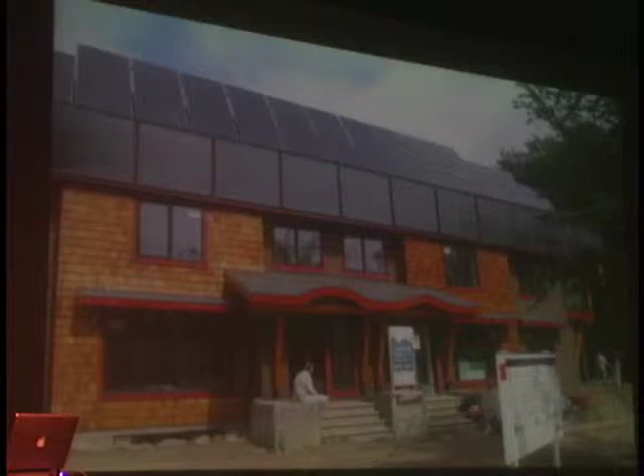Then we come close to 40 years into the future, and this is a house that I feature. These fellows who did this house, Peter Amerongen and Gordon Howell, two engineers—one's a contractor, one's an engineer—from Edmonton, did this Riverdale zero net energy example for Alberta. It's in downtown Edmonton. It's a duplex. It has amazing characteristics, and of course, when you get to 2008, you can now go zero net with both solar—vertical solar collectors for heat and hot water—and also electricity with photovoltaics.

And you can use the clever idea of a duplex so you can share a common wall and save the heat loss in one wall, because you now have 2 family spaces sharing one wall, not losing heat against that wall because it's the same temperature on both sides. You actually double the area for solar collection for the same heated spaces below. So if you build a whole block of these, you can see what an advantage that would be.

This is what we're looking at in how we moved. This is best looked at from right to left, which is sort of the Chinese way to look at this, I guess, but this is how the article was set up. My house, off Farmers Loop, I bought in 2001, and it was a 1975 house. It was sort of like this, a 2x4 house, R12 wall, ceiling—well, we had a lot more insulation in the ceiling than that.

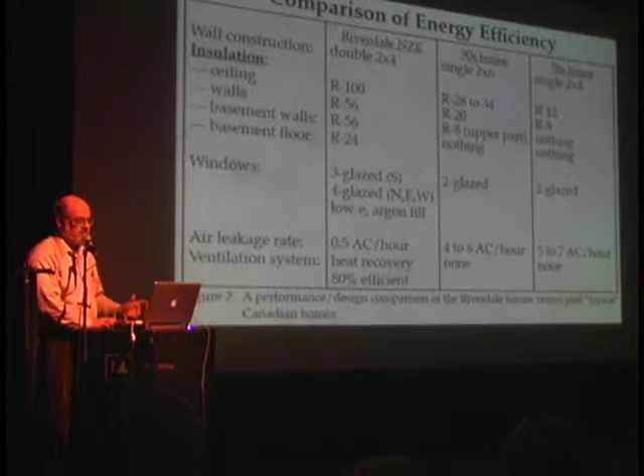So why do you take it to this limit? Well, the condition given for net zero energy is: try and save as much energy as you can so that you don't ever have to buy it again, because the way you're going to get it is from solar. You have to build this house presuming that natural gas is never going to be available, so anything you spend for energy has to come from solar. Solar is a whole lot more expensive, so it really, really pays you to save that energy, because once you've saved it, you never have to buy it again.

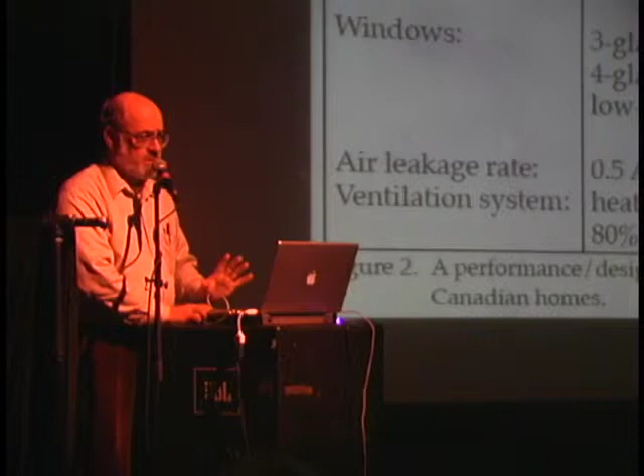That lesson needs to be really inculcated in our system and our paradigm, because time and time again you hear in politics, from public speakers, on talk radio, that what we really need is cheap energy. No, what we really need is really, really efficient houses so that we don't need energy. That's what we really need. We need to escape from the need of combusting fossil fuels, and the best way to do it is this zero net energy idea.

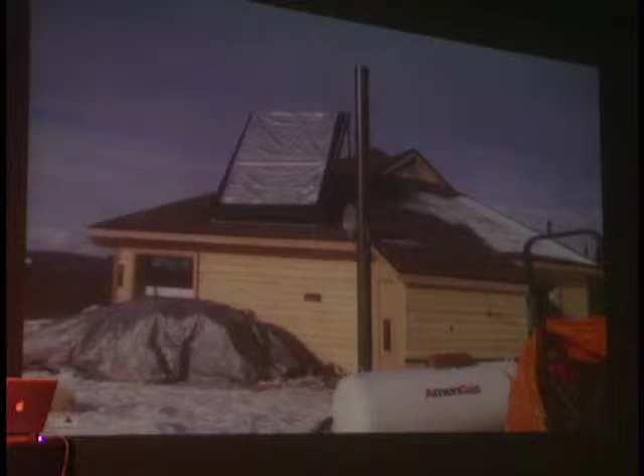I think, I don't know, but Torsten can tell you who built his—I think Dan Givens did this, but I'm not sure. Dan has been the go-to guy for masonry. He's a mason and has done a lot of them now. He had a booth at the home show.

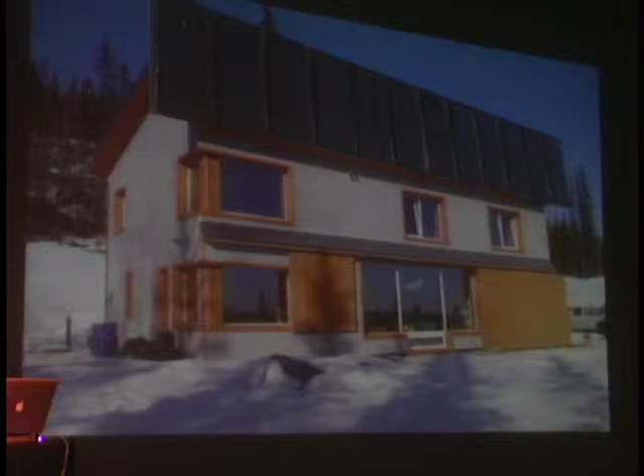You'll see more of this. This is Torsten's—I don't want to overplay this, but I finally got to visit it after the home show. He has exterior shutters and a solar design very different from Carl's house. Both these guys are really doing research for the rest of us, and that's what I love about this community. It's always been that way, and now we're back at pushing the envelope again.

We'll talk about it. Not going to talk about this a lot, but some other things about how to design from the sun. This is from Freiburg, Germany, the solar city, where I took a course on integrating solar design into buildings.

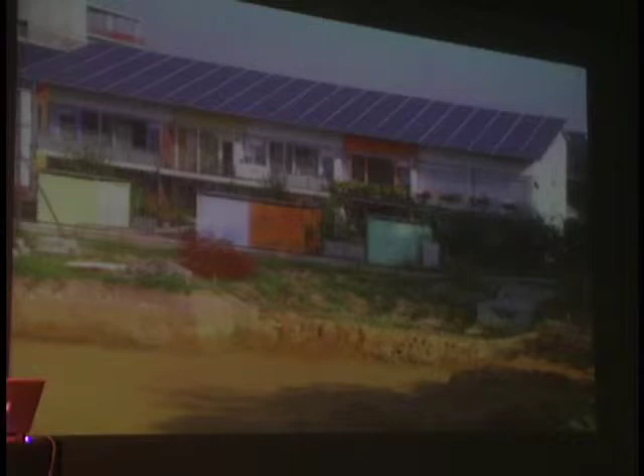Right now, you'd want a shade such that at the equinox, about half the window is covered. At the summer solstice, you'd want all the windows shaded so you don't overheat. That's what this exact thing does. We can do this here. I have an example of how to do that in the manual. I always try and show this slide because it gets a concept and a magnitude of comparison across to people which is impossible any other way.

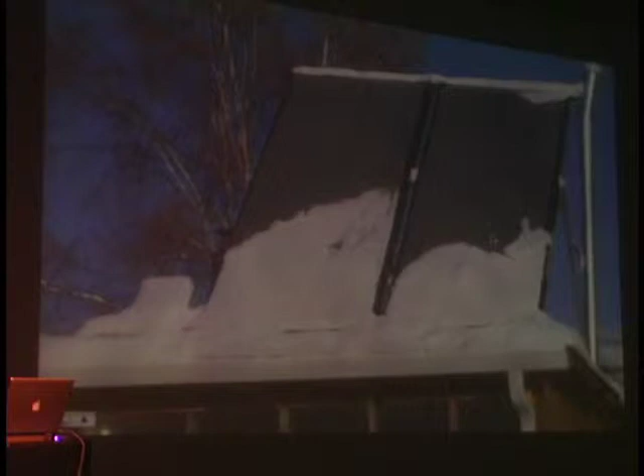This is my own solar collector, and I just thought I'd put that up there. Here's what happens if you don't think through what happens with snow—I have a photovoltaic solar pump, and I put the collectors at 60 degrees. In spite of what I say in my solar manual: don't do as I do, do as I say. Put them vertical if at all possible—you won't be sorry. That's what it looks like inside, and I'll go now quickly.

I don't have that much time because I want to give Torsten a good shot, and I've got to change computers. But let me go to the solar design manual—make sure I get the right one.

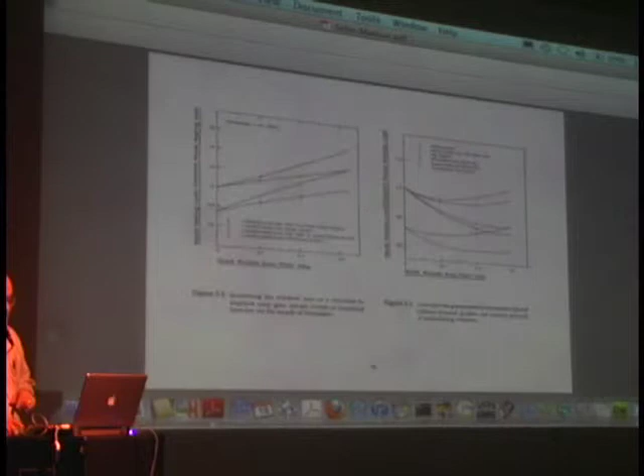Okay, I'm going to—you can see this back at the—let me see, I'm going to go to the navigation panels. Well, let me just go. Okay, let's go, there you see—let me make it a lot bigger.

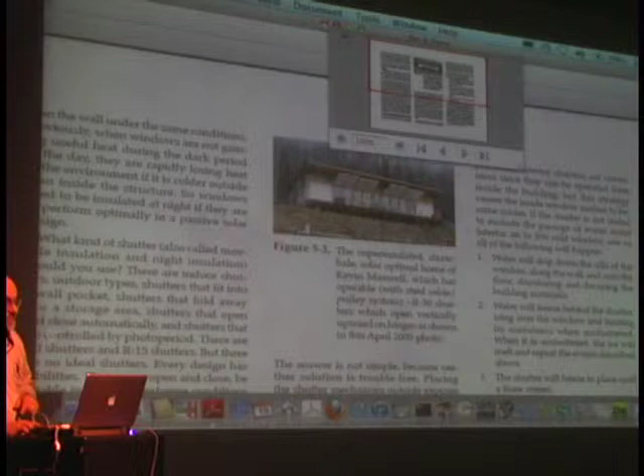There you can see Kevin's house again, super insulated, straw bale, solar optimal house of Kevin Maxwell.

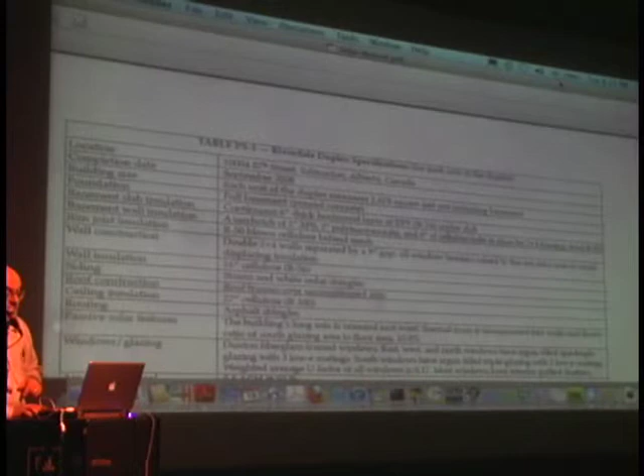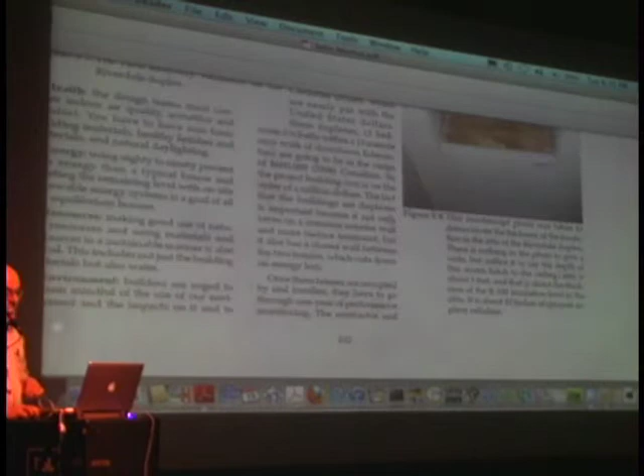But I want to go to the optimizations that I do. What I did was try and use a computer program called F-Chart to see what kind of performance, what kind of savings you could get by trying to increase the solar gain, increase the insulation in various ways by modeling it with a computer program called F-Chart, which has a passive solar design option, and I can set it up to say all these things. The window area, I can change the number of glazings, the slope of the window, the night window conductance, the day window conductance. I can make it appear to have a shutter. And I can do all these things, and I did it for Anchorage.

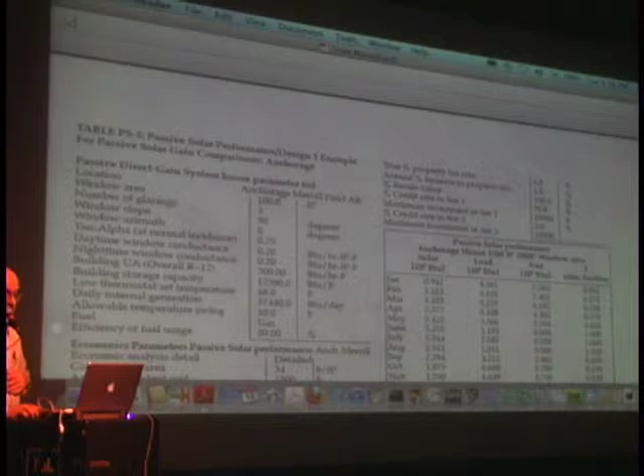I want to show you some of the things that happen here. The first thing I did is model the solar performance of what is effectively an 80s house with an R value overall of about R12.

This is the backup heating requirements. This chart is complicated and I have to quickly go over it, but this is the amount of solar energy gotten on the windows. Just to make it clear, this is in millions of BTUs, and I have an easy way for you to understand what that is in terms of gallons of fuel oil.

One gallon of fuel oil has a gross heating capacity of about 138,000 BTUs. If you burn it at 70% efficiency, it's about 100,000 BTUs per gallon. So 10 gallons of fuel oil is 10 times 100,000 BTUs, or a million BTUs. So if you simply take these numbers and add a zero, you get the number of gallons of oil equivalent, just about. So the amount of solar energy on 100 square feet of window in Anchorage over the year is 270 gallons of fuel oil equivalent. Is everybody with me on that?

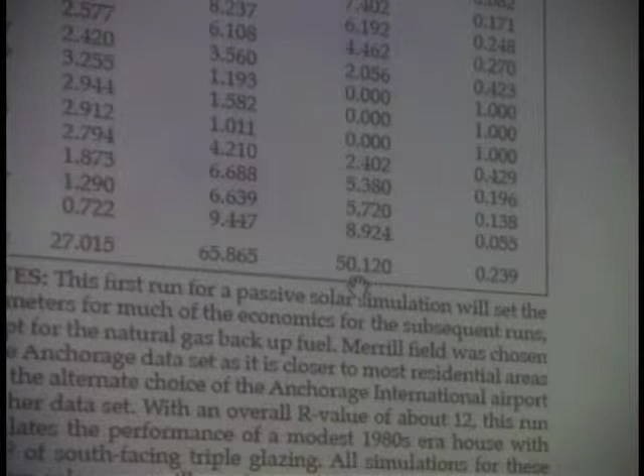Making a quick run here. And the load for the building, this is a 1,200 square foot house with 100 square foot of windows, no shutters. It actually takes 658 gallons of fuel oil equivalent. Of this 658 gallon load, the backup system gives you 501, and the solar fraction is 23%. Of this amount, you can only use 23% of it to get your solar heating fraction.

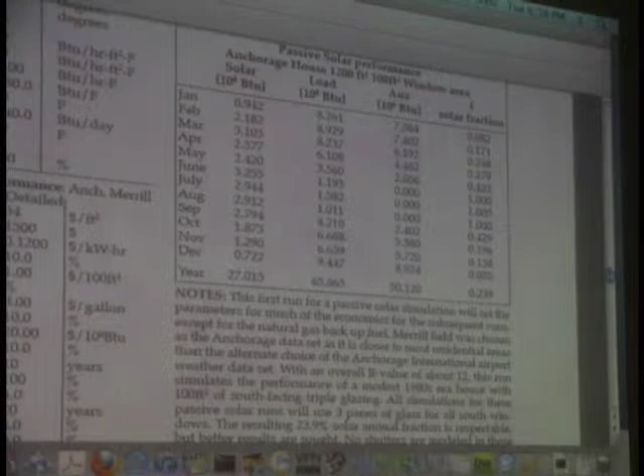This is the fraction of solar heating by month. You actually have 3 months of the year when solar heating gets you, but it's the months of the summer when you, of course, naturally would. That's what the sun does in the summer, keeps you from having to heat.

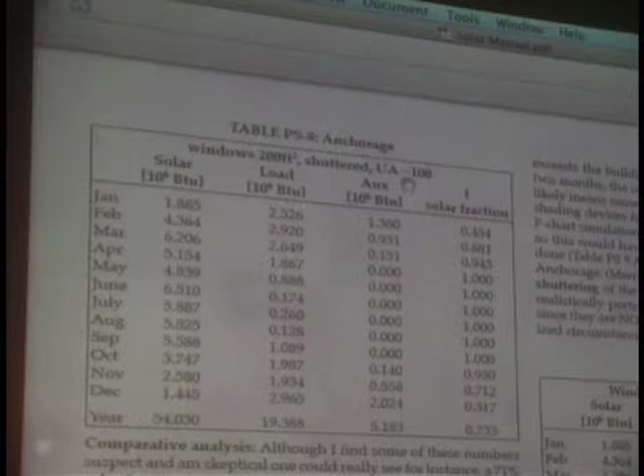Well, what you end up with, and let me go to the final shuttered option, is in Anchorage. What I do is I go through several iterations and I come up with a 200 square foot window shuttered house with R values of about R37 all around it except for the windows. It has shutters on it of R10. Remember what the amount of energy was in the first house, the 80s house, about 501 gallons of fuel oil. You end up with a house that uses 51 gallons of fuel oil.

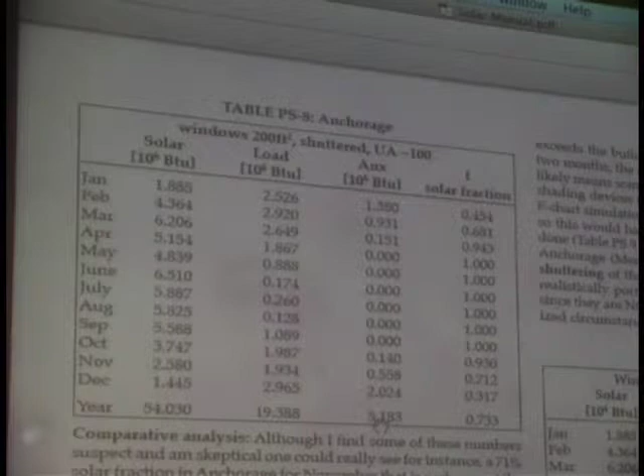What that says is, it should be feasible. This is Anchorage, and Anchorage looks pretty good in this kind of optimization. If you really super insulate the building, optimize it, shutter it, you can cut energy use by 90%.

Now, there are lots of problems with this, because what happens in the summer and in the early spring is you overheat like crazy. And I have a solution for that. But anyway, what I do is I say, okay, we don't really have shutters, so I'm going to say, what's the option without shutters? And it's not all that much worse. It's 72 gallons of fuel oil. But if you don't have shutters, it makes a difference, but you still do pretty well, and you get a 67% solar fraction. Now, these are pretty amazing numbers, and I could spend more time on them.

In Fairbanks, if you do the same thing, you start out with a solar fraction—you can't do as well because it's colder and darker in the winter, it's a harder place, we've got to be more clever. But you start out with 757 gallons of fuel oil, and you can get down to an optimum of about, let's see, what do I finally get to here? 263. I think we can do better than that. Let me see. Yeah, 141. So you can cut about 80% in Fairbanks. Not great, but it's pretty good.

You're getting much more sun on the windows than you need in the building, and so you've got to do something to shade it. I have a solution for that too.

Let me go through this, and here's the solution, which is already out there in the real world on the President's house on Yankovich Road. This is the most—and I give credit, and this is all I'm going to do because I want to give Thorsten 45 minutes or so—but this is the solution to overheating.

It is a fixed overhang shutter—not a shutter, but a shade—which all you have to do is know the solar geometry. It turns out the highest elevation angle the sun reaches in Fairbanks is 49.5 degrees. So if you know your trig, you know that opposite over adjacent of 45, which is pretty much going to shade everything, is 1. The tangent is 1.

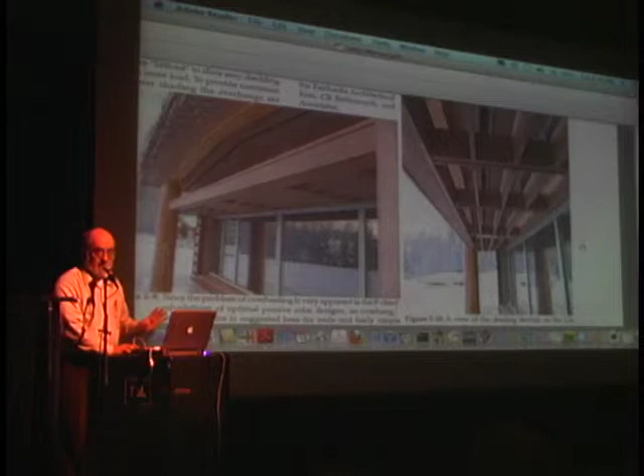So, lots of things more I could talk about, and it takes me five and a half hours with the photovoltaic chapter to go through the manual, so you're getting a really quick journey here. But let me stop there, and unfortunately we can't take questions because I've got to dismantle my Mac addiction and let him do his PC.

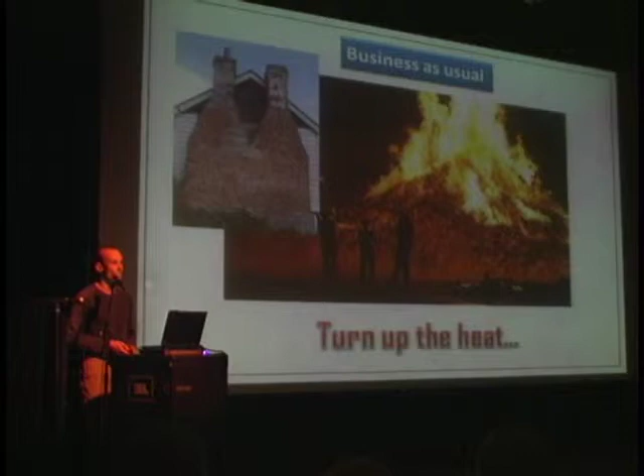Why are you guys here? I think that's one of the reasons. We are basically operating on a concept of business as usual. We're building very inefficient buildings. We're adding lots of heat to them to stay warm in a cold climate, and somehow that equation doesn't work out anymore. So where are we going? What's the direction we're heading right now? That's my question. I don't have a crystal ball, but I don't believe it will be very pretty when we get to the top.

I wouldn't be surprised if we see $5 for heating fuel by next year. And then what are we going to do in this community? So we have a problem. We are in trouble. We know it. Evolution is catching up with us. The trouble really is not that we are in this position, but that we are still arguing about it—we're not doing anything about it. So we have come up over the last 4 or 5 years with some good solutions: green building, all of these great building standards, LEED, National Home Builders Association.

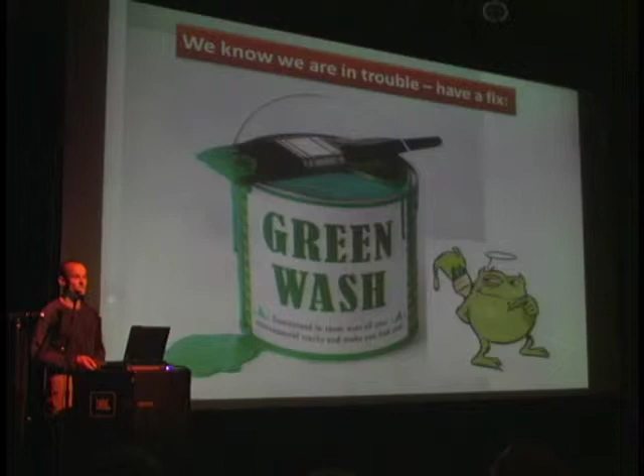Everybody comes up with some solution, but in the end, today, it's all greenwash. There's nothing to it, there's no substance. And then the auto industry, of course, they're catching up too. We're really getting caught up, and that doesn't help us.

We are living in a very extreme climate, and it's difficult to build in Fairbanks, Alaska, more difficult than in most other places. We so far have gotten away with just building inefficient buildings because we could afford heating them, if you could heat anything with dense fossil fuels, because they have a lot of energy encapsulated. But if we are running out of these fuels, or if they're too expensive, we have a problem.

And then, of course, here in our latitude, we have another problem. For two months, we have no sun, literally. And that is a problem if we're trying to heat a house with solar.

So here I am standing saying, hey, it's not a problem. We just build houses more efficient, heat them with solar, and problem solved. No heating system, no utility costs. We're comfortable.

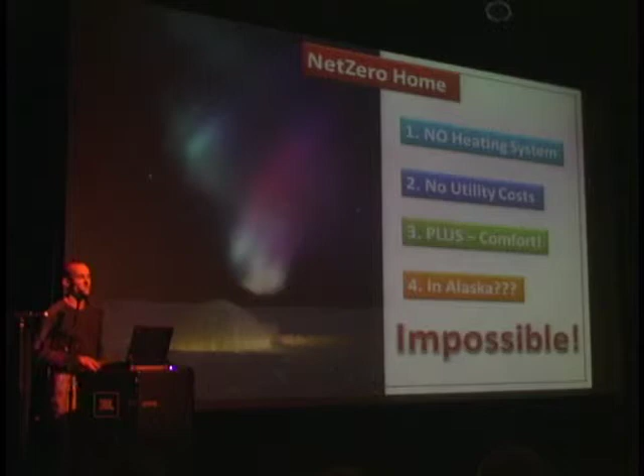But wait a minute, we are in Alaska, right? So is that possible? The average person says it's impossible, and I run into this a lot. A lot of people tell me even today, you know, it can't be done. This is silly, it doesn't make any sense, because in the winter it's dark, it's cold, we have 40, 50 below. You cannot be without a heating system.

So let's step back here. Richard was putting up a nice slide about the first net zero home. But are we kidding ourselves? I mean, people have lived here for thousands and thousands of years sustainably. Maybe not comfortably by our standard, but they've lived here. And there's really nothing new about what we need to do to get to this point.

Karl Kassel, his Octagon building was up on the slides. He's hiding somewhere in here, I'm sure. He was really the first person who walked up to me and kind of liked the idea of, can we do this? And he was willing to jump out in the cold water and do this. I think we have to give him a lot of credit for it, because without his house, this house wouldn't be here. Without this house, we wouldn't know what we know today to build this cheaper in the future for lots of people, because this is going to be the future whether we want it or not.

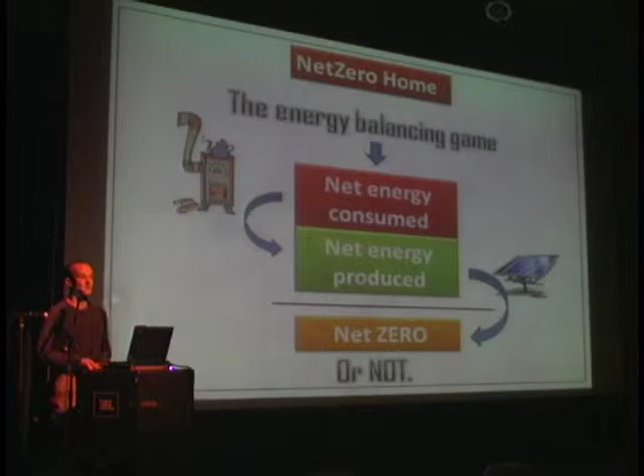On an off-grid house like ours, how would we ever get to that if we don't have anything to really store energy? We're storing energy, thermal energy, in a big water tank. We can store electricity for a certain amount of time, but there are times when things are not equaling out. And on all of these net zero homes we see worldwide, that equation is always done on the grid. Lots of photovoltaic, it's sold back to the grid in the summer, and then in the wintertime, basically, that balances out the whole equation. If this is really net zero or not, I don't think that's really the crux.

The crux is really we need to figure out efficiency in the buildings. And I personally really like Passive House, which is a super insulated building standard from Germany. It was developed there about 20 years ago. There's currently about 25,000 certified buildings in Europe to this building standard. And that building standard basically gives us benchmarks. This is an efficiency level we need to be at where it makes sense. And that benchmark is what is really, really important.

Net zero doesn't give us anything. It tells us at the end we need to be at zero, but it could be anything. It could be a huge array of photovoltaic thermal collectors which offset the energy consumption of the building. And that's kind of what happens on a lot of new projects, in my opinion. We're getting back into this same old groove: let's turn up the heat. It's more difficult, more expensive to do so with renewable energies, but it's possible. So instead of looking actually at the building, which is boring, we're going back to let's turn up the heat.

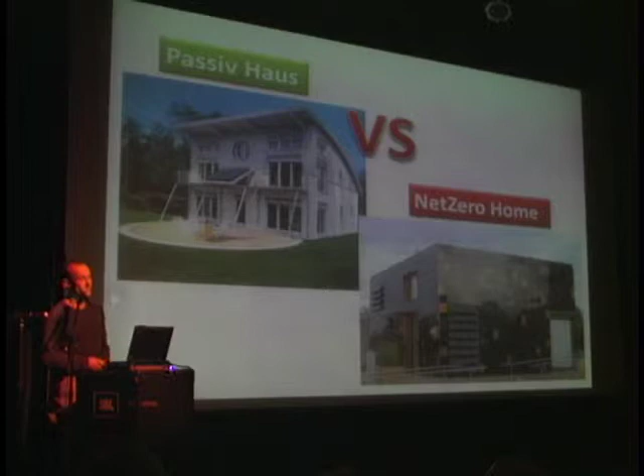So Passiv Haus, if you look here, there's two collectors. This whole building here, this is from the Solar Decathlon, that's a German entry. That whole building is basically a solar collector. So the baseline for a building really has to be the building itself. We need to look at energy efficiency. And here, again, if you look back, how did people live here? What kind of a structure did they use? And how were they able to heat them? That can give us a tremendous amount of answers to this whole question.

And I find it very interesting, and I keep looking back to the 50s, to the 60s, the last century. Now I'm looking back 1,000 years, and I find better answers with knowledge which we had back then than what we have now. So I think we're really arrogant about how we go about building.

Passiv Haus basically gives us very few key principles. These principles do not change if it is somewhere in Frankfurt, Germany, or if it's in Fairbanks, Alaska. It doesn't matter where you are, these principles are the same. And it's based basically on airtightness. Why is airtightness so important? You don't lose heat. Anybody? Airtightness, you don't lose heat. Yeah, pretty simple. There's a lot less heat loss, a lot less problems. There's so many good things about airtightness.

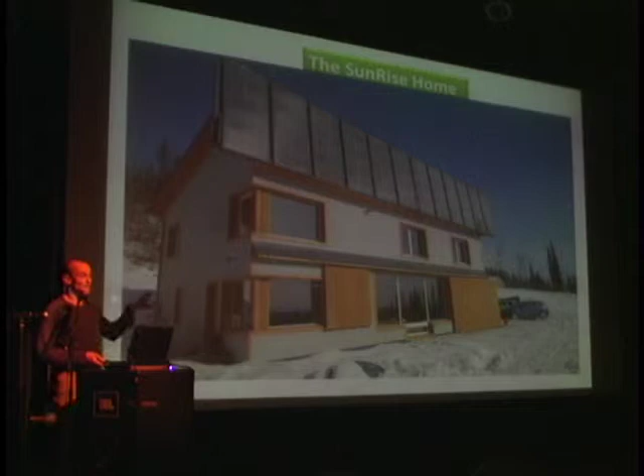I built this thing on my bank loan and my earnings, and I still work for a living, and I still got to pay bills like everybody else. So this is not a research project. This is just somebody trying to do something.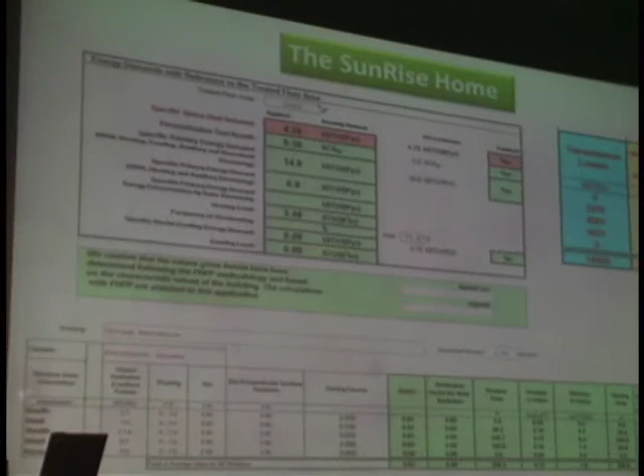This is basically a spreadsheet used to calculate an energy model of building to passive house standards. We see up here the total magic number for space heating demand. If we have any engineers or heating guys here, they will understand this number and what it actually means. It basically means you can heat a building like this with the equivalent of 2 hair dryers and 2 toasters. That kind of puts it in perspective.

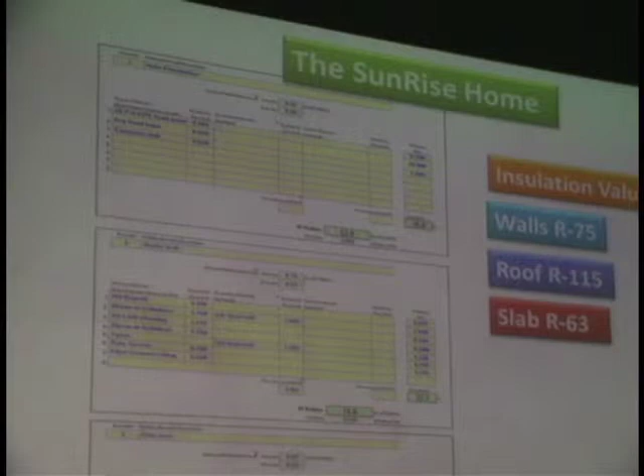How do we get there? The wall insulation is R75, the roof is R115, the slab insulation is R63, and that still would never get us where we need to be without really cheating here. This is basically the crux about our climate.

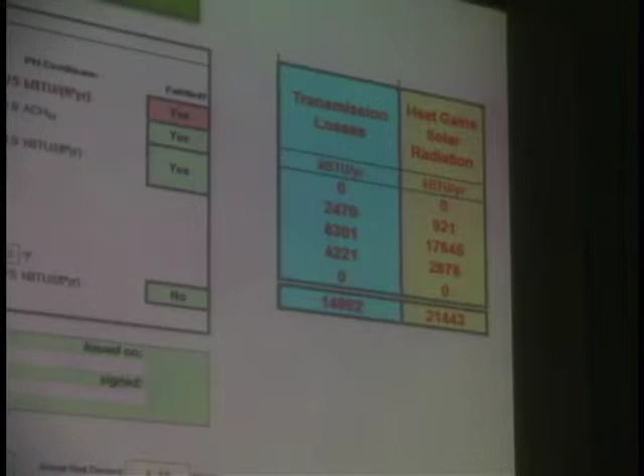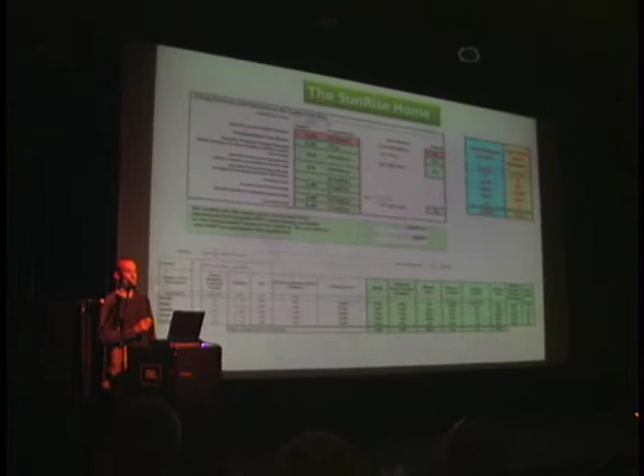It's all about windows. What Richard was showing us is so important. We need to get sunlight into the building. Once the sun is down, we need to make sure we don't lose energy. What you see here is basically what I tried very hard to do on Carl's house, which was impossible - thermal shutters. This is our loss, this is our gain through windows on an annual basis. So this needs to be at least in balance, but now we have a plus, which explains why I have not heated actively my house since February 16th. There's no heat input besides sunlight, which keeps me at 68 to 72 degrees since February 16th. That's not too bad.

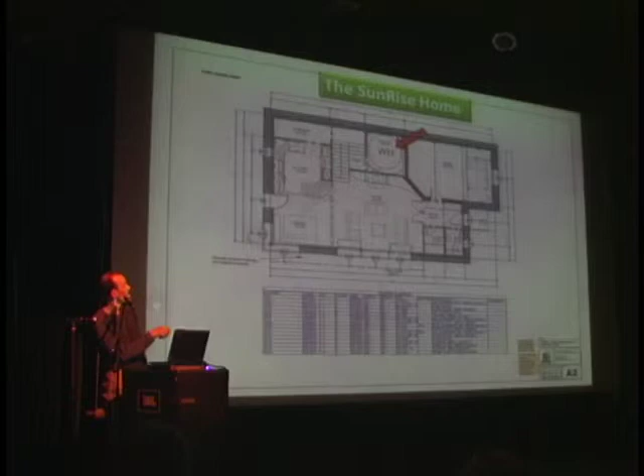So here we're looking at the ground floor. In the back is the annual seasonal heat storage tank. In the front is what is heating the house for quite some time - that's the passive solar gain. And then just your average floor plan really. There's 2,300 square feet, 200 square feet are taken up by the tank. So it's an average family home, nothing really out of the ordinary.

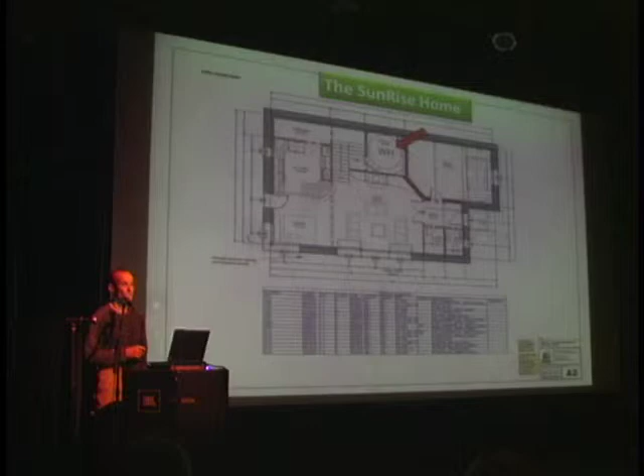Of course, it has an Arctic entry, which is very important in our climate. And my backup is the masonry heater. But the house does not have any fossil fuels. There is no boiler, there is no backup. It can only heat with solar or the masonry heater. And that is not just for heating, that's also for domestic hot water.

Everything in this house is a prototype. I came up with a different idea of a remote wall for cold climate. We used cellulose as our main base of insulation for several reasons. Cheaper, number one, of course - we want to build these things affordable. And number two, embodied energy - it's a lot less energy than foam, and heat storage capacity within the building. The density of the material is medium weight versus lightweight, which is a huge difference.

And we have data collection throughout the whole building through Cold Climate, and we've seen some really, really good data out of it.

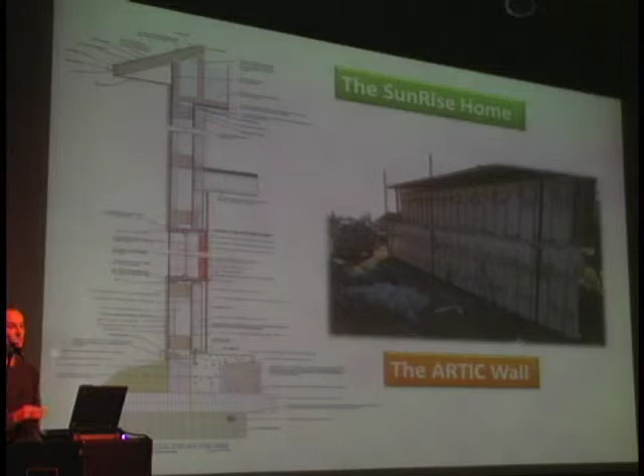So here, what does it take to build a passive house in Alaska? Really, the short of it is it's a lot of insulation. There's 12 tons of insulation in this building. That seems really excessive, doesn't it? But doesn't it seem very excessive to have to pay thousands and thousands of dollars in heating fuel? I'd rather pay it once for insulation, and then for the next 80 years this building is covered.

Another big feature of the house is basically internal thermal mass, which is insulated. I do that through a mass-loaded foundation system, which is super insulated. It's about 180 tons of sand, placed within 12 inches of EPS. That creates our thermal flywheel, basically, which allows me right now to store enough passive solar gain that without 2 or 3 days of sunlight, I'm still comfortable. And I'm not overheating because I have places where this energy can go.

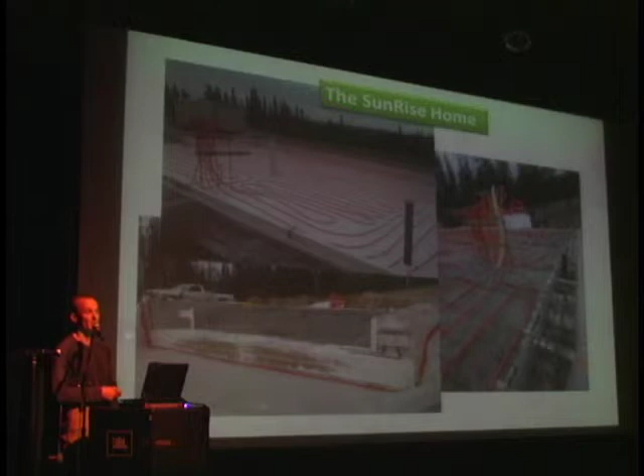Works really well, so there's a couple of shots of the foundation, super insulated. There's 4 thermal bridges - exposures of anything which can transfer heat out of the building - throughout the whole building. There's basically water in, sewer main out, HRV air in, HRV air out, and that's it. There's no other penetration anywhere really.

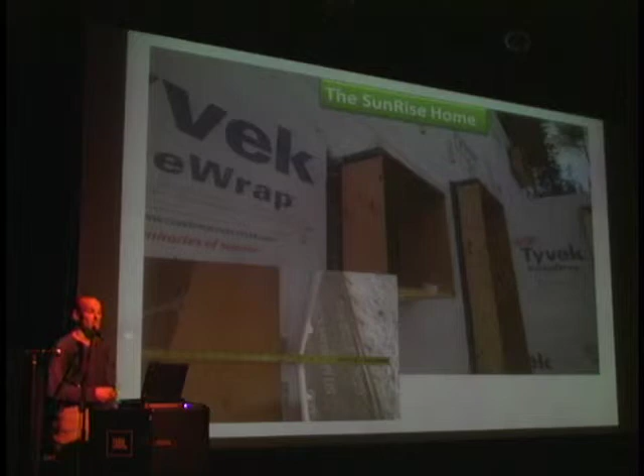It's a pretty massive wall, 22 inches thick. So there's a lot of insulation which needs to go in, and the insulation needs to be on the outside. Our typical construction doesn't address that, but who in their right mind would try to stuff their down jacket in the wintertime under their parka instead of putting it on the outside? It's kind of like ground insulation - why do you put a pad on top of you instead of under you? It all makes sense, it's real basic. Insulation needs to be on the outside in our climate.

Interior shot also on the top. Basically, this building doesn't have a classical vapor barrier. One of the other points I'm trying to make with this building: that 6 mil plastic vapor barrier is a band-aid which creates more problems than it solves. This building is diffusion open—it can breathe in both directions.

Diffusion is not the problem, it's airtightness. It's very airtight—the airtightness on this house is 0.48 at 50 Pascal. So it's completely airtight, but it allows moisture to travel.

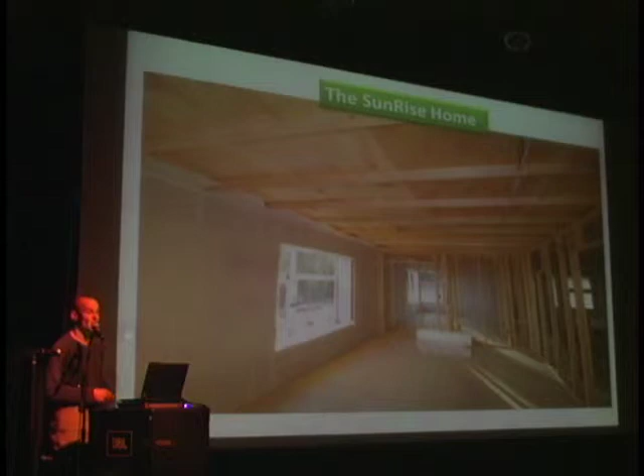Here's a shot through the big window. In the back, in front of it will be the masonry heater, and the storage tank sits right in the back. A shot down the wall cavity—it's basically just a 12-inch big cavity filled with insulation, dense packed cellulose.

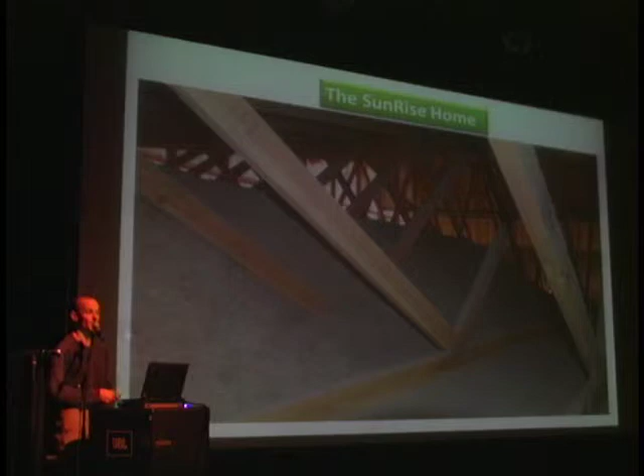And then here's a good shot on the interior, kind of making a point about passive solar. This big window heats my house for over 2 months by now. So one big window heating the house in the really cold temperatures—I mean, beginning of mid-February, we still had 28 below.

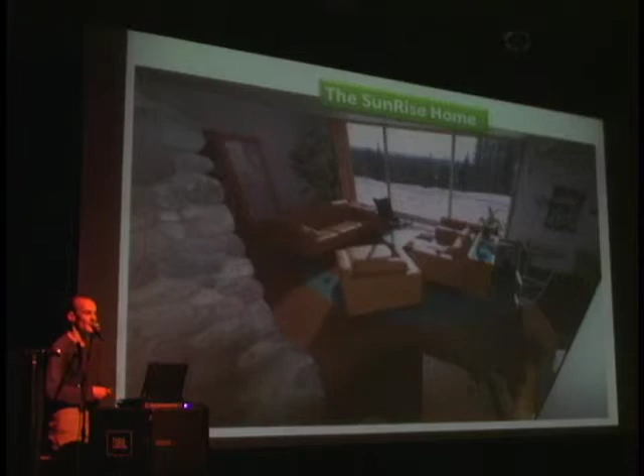And at night, I have an R40 shutter which closes this big window up, but during the day, it allows a lot of daylight and a lot of sun to come into this building and heat it up. And it does not overheat because we have additional mass built into it where it can be stored.

So now, after all the boring part, people always want to see: how many solar collectors do I have to put up to heat my house? I think I have answered incredible amounts of phone calls since my house was in the paper—people calling me up, hey, how many solar collectors will I need to heat my house? Unfortunately, that's not the answer. We need to build efficient buildings first. We need to retrofit old buildings and then look at renewable energy systems.

But this is the fun part. This is probably why a lot of people are here, because they want to know, how in the world did you do this? And why is it so important?

You know, it's kind of pathetic if you really think about it. We can look at solar manuals from the 1900s, and we had all the answers. I mean, Rich already showed a couple of these slides. I mean, what are we thinking? You know, it's like we're drilling a hole in the ground. We're spending millions and millions of dollars to extract oil, and it's right in our face every day.

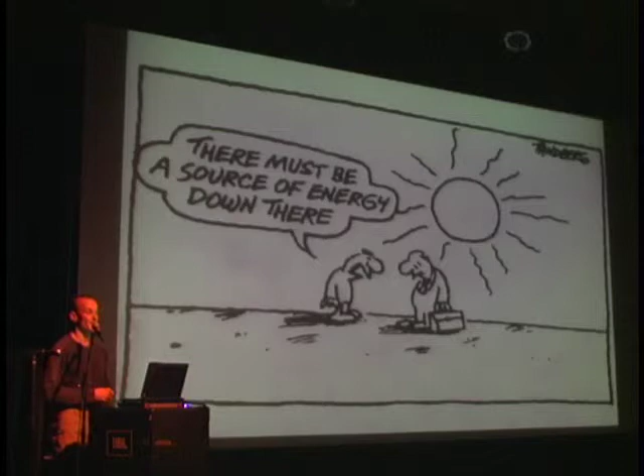So, welcome to the second solar age. I totally believe that within the next 50 years, we will completely transition into a solar community. And why is it the second solar age, not the first? Well, because this is where the first one we've been through—we had 100 years of a break where we burned fossil fuels, and now we're back to reality.

We're starting to run out. But we have a tremendous amount of energy we can get out of solar. Richard already talked about this—we have more solar available every day than we can ever use. And that's not unobtainable technology we have to develop. It's something we already know for 100 years.

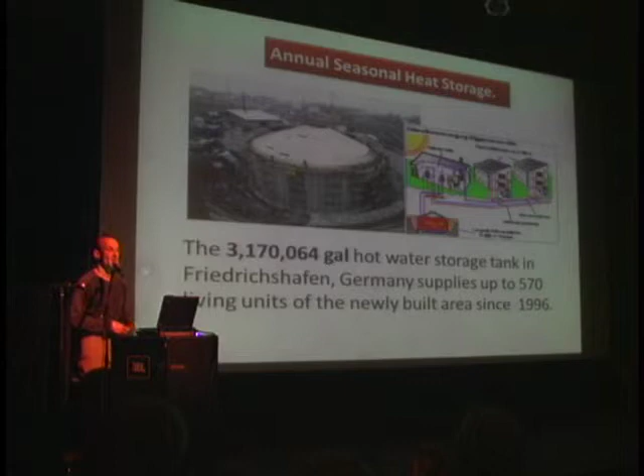It's a problem. What are we doing in the wintertime when the sun doesn't shine? So basically, there's been a lot of solutions which have been put into place on a bigger scale. This is a project from '96, so this is a long time ago. There's currently over 100 projects worldwide for annual seasonal heat storage systems, basically on a community scale. This heats 570 homes since '96 off solar.

If we're looking at solar, we're looking at two completely different technologies. One is basically creating thermal energy with hot water. The other one is creating basically electricity. What's the big difference really? The big difference is fairly simple: efficiency. We have not figured out a really efficient way to produce solar electricity yet. Panels, basically, if you look at efficiency, solar thermal is about factor 4 versus PV, which for us really is something interesting to look at.

What is our main demand? It's not really electricity, it is heating. Out of the whole 100%, we have heating, domestic hot water, and then electricity. So if we get rid of heating and domestic hot water, we're doing a lot better.

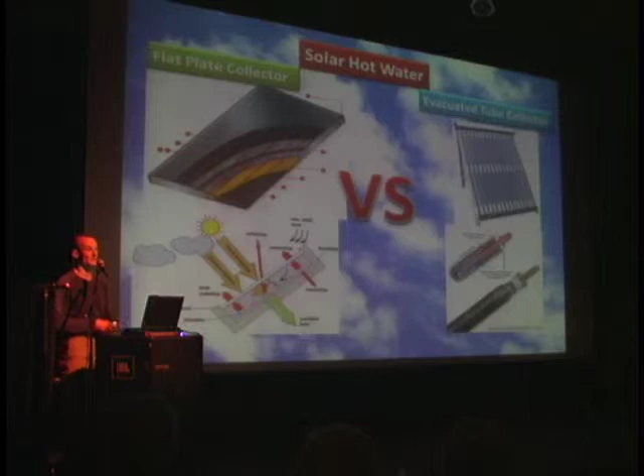There's different technologies. My experience is evacuated tube in Fairbanks does not work well because of the really cold temperatures. They ice up and don't have enough residual heat, and they just stop functioning. Versus the flat plate collector, which is more inefficient, but has enough off heat to get rid of the ice.

Typical installation is a solar hot water heater, 2 panels. In the summertime we can produce some hot water. That doesn't give us any heating, that's for sure. So if we are going to heat houses at the same time, we need something different.

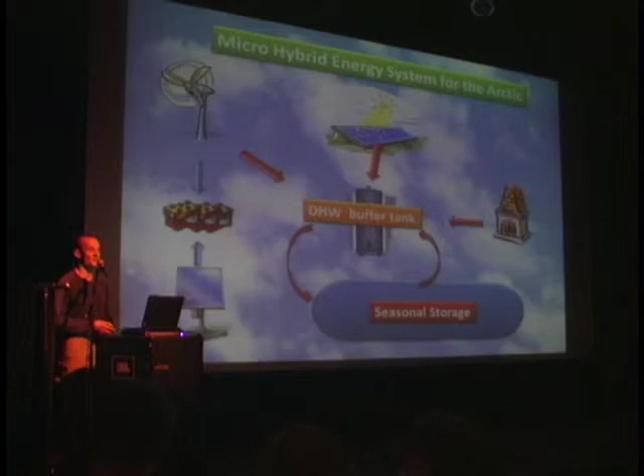I call this a microhybrid energy system. We need to collect more than just one energy. We need to collect multiples and store them and have the ability to bridge time, which we do with seasonal storage. On my house we have 480 square feet of thermal collectors.

They're 4 by 10. It burns very hot, and we can capture all the energy. We've by now designed a system around it which basically makes domestic hot water at the same time. I can produce enough hot water for my family of 4 in this house, and heating, with 1 fire in the morning and 7 watts of energy running a pump. That's not too bad.

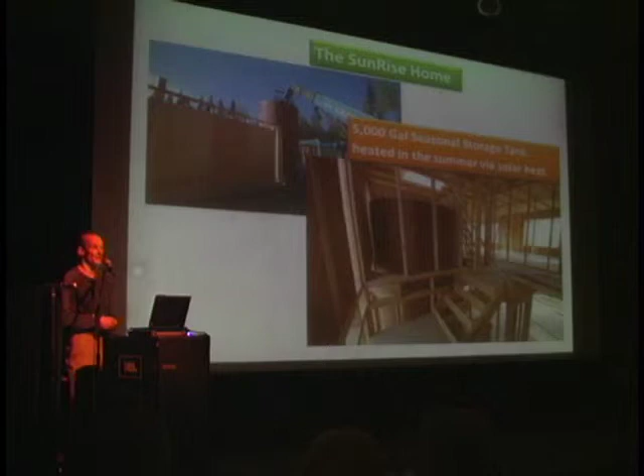Big part of it is this energy system, which is based around a 5,000 gallon storage tank. On the first project, we buried the tank outside. We learned that that might not be the best idea. I put it now within the building. It stands upright so that it can stratify.

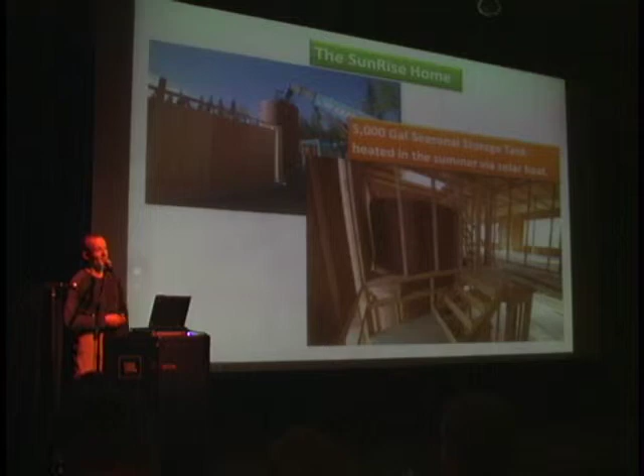We need high temperatures, low temperatures, and we're producing basically domestic hot water with a tank and a tank design at the same time. This tank sits at 160 degrees completely, bottom to top, 5,000 gallons, since mid-February in my house. So I have about 2.5 months of hot water and I have no heating demand.

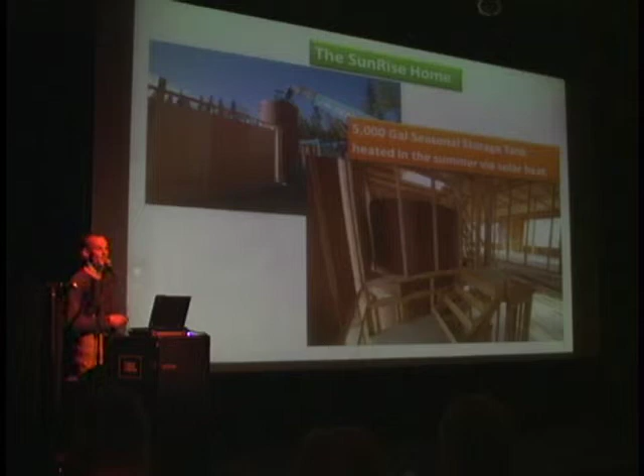So I really screwed up. It works too good. I can run hot water on 2 tubs wide open for over an hour before I drop below 120. It's incredible. So yeah, solar doesn't work.

This here is a custom-built solar stratifier. That's basically nothing else other than 8 inches of CPVC, which I bought for a few hundred dollars. All of this stuff is off the shelf. The tank is a salvaged old fuel tank I cleaned up, I bought it for $1,000.

It's not a stainless steel tank, it's an old fuel tank. I cleaned it up and I purchased, as you can see here, a liner basically. There's a company in California which makes liners specifically made for heat applications. Lifespan 15 to 20 years.

So it lives in the middle of the building. We never want to take this tank out. We never want to have a leak, so we put a liner into it. We have a manhole on the top. In 15 years, we're going to drop this liner out, put a new one and start all over.

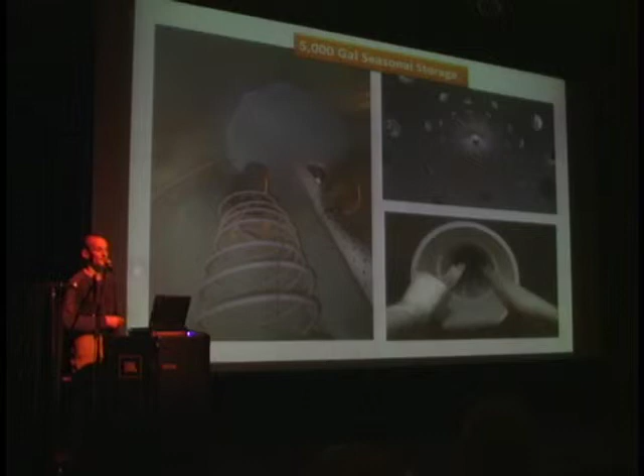It's not really too difficult. The parts in this, it's really cheap. There's a couple hundred dollars in the piping. It's very low key. There's no moving parts. It all works by physics.

And this is all the engineers in the room can laugh now. This is my art drawing on it. I don't really want to go too much into it because this is the 2nd generation, and by now I'm at the 4th generation. We're improving this day by day, and I learn every day on it. But I see a lot of potential.

But in a nutshell, how does this work? We have heat from the collectors, hopefully. The collectors and the house side is all based on glycol, and we can heat the house directly from the collectors. The slabs basically can gain heat directly out of the collectors.

Or if we have, like right now, no heating demand, we store it in this tank, and basically it just drops in. Depending on its weight, its density, it finds its own weight density within the tank, and I can start my collectors in the morning at 10 o'clock when we have maybe 65 degrees and heat up the bottom, which is maybe at 40 degrees.

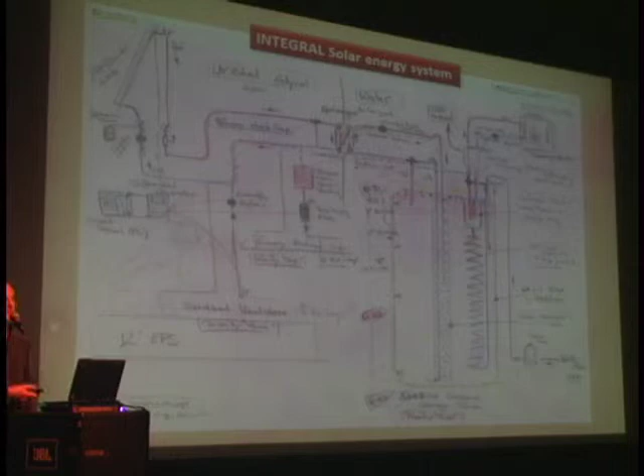And then during the day it will come up, so we don't have this problem of a domestic hot water system. 120 degrees is our target. A BTU is a BTU, so we want to collect as much as we can. And this works really well because it can collect all of these different temperatures. We can heat a house with 70 degrees, and we don't need these high temperatures, which we don't have available when we really need it.

But just as an example, February 1st, I pulled 180 degrees of hot water already off my roof. So it works really well. I had 38 below at the collectors at 8:30 in the morning. By 11 o'clock, I pulled 134 degrees at 24 below outside temperatures, and by high solar noon, I pulled 180 degrees.

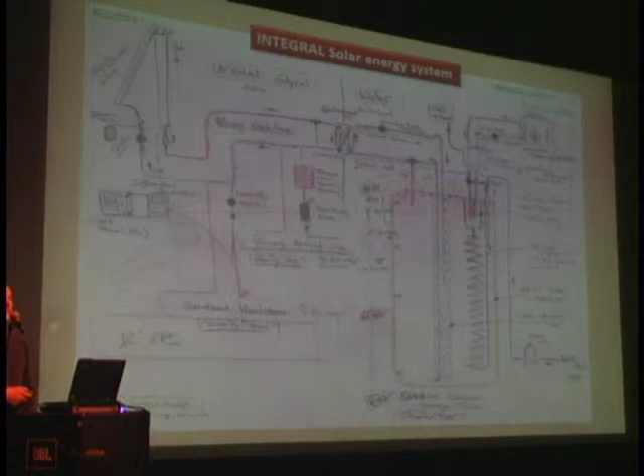So it's not that this can't work. We just have to design it right. And for us, the solution really is in a community-based solution, in my opinion at least.

This is an example out of Canada. This is the only one we have in North America. There's nothing in the United States, and hopefully we will see one in Fairbanks. It's at least my goal. It's basically, we take this concept to a bigger scale, which makes it more affordable, makes it more realistic, and makes sense anywhere between 30 and 60 homes. And we do a community-based heating storage system.

Drake's Landing has about 800 collectors, which dump into this heat store, which is fairly easy to build. And it makes a big battery out of the ground. It's heated up all summer long, and then in the wintertime, it's drawing the heat back out. It takes about 2 to 3 years to get this thing up to charge, but it works.

I mean, there's over 100 of them worldwide. Germany's by far the leader on them. They have many, and a lot of them in production. And it will work here just as fine. It will even work better because we have so much sun in the summer.

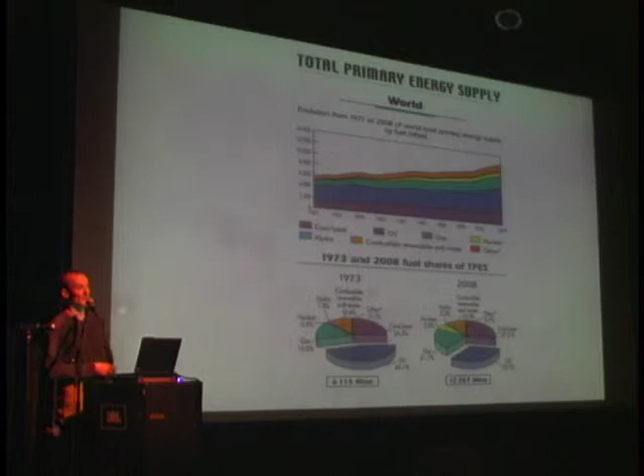Some interesting numbers. I always kind of like to throw this up because we always think we're so ahead of the curve. Let's look here. This is us. Currently, right now, South Korea has more solar installation per capita than United States of America, and they have a solar community heat storage already built. We're really not ahead of the curve as far as solar goes. Energy consumption worldwide, primary energy supply, we're at 0.7 for renewable energies right now. If we ever want to get to 100%, we better hurry up.

So key lessons, what's really important to make this all come together? We need good teams. We all need to work together. We need to get off our egos of thinking, oh, we have all the answers. We don't. We need to work together. We need to find answers together. And we need to work together because we have a common problem we need to fight.

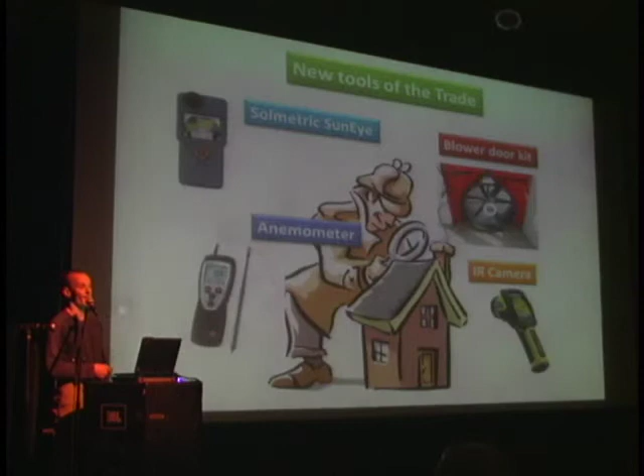And we need to re-look at, what is a building? Technology is really there. We have a lot of good tools. We can figure out where's the best solar radiation. We can figure out air tightness, fairly simple. And we need to build efficient buildings. Any building we built, I would say 95% of all the buildings in this town built today are crappy buildings.

That's the short of it. And that is very sad. It could be an opportunity, but it is a liability. We will remodel all of these buildings in the next 10 years because nobody's going to be able to afford these houses. I mean, $5 of heating fuel, who's going to be able to afford it? Nobody.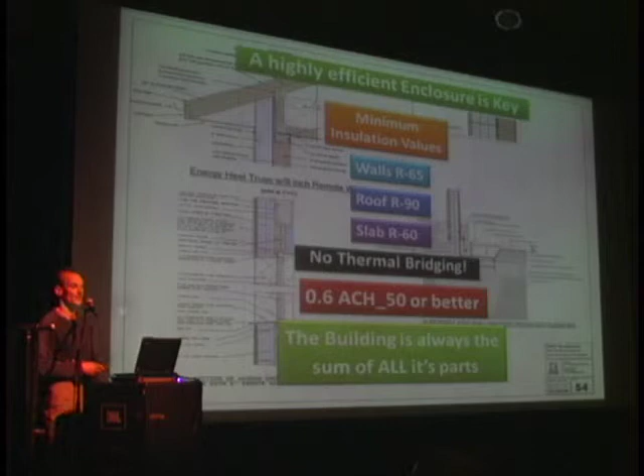Key things to remember: insulation, insulation, insulation. Something not everybody's familiar with is thermal bridging. It's basically take a piece of metal and heat it up on one end and hold the other end. What happens? You're at one point going to get very hot. And that's the same thing on buildings. We cannot afford cold to travel into buildings, so we need to design accordingly.

We need to build airtight. It's not difficult. It's just a matter of design and practice. And the biggest part for me really is none of this would work if the building wouldn't function as a system. It's all about making everything work together.

And I said it before, and I say it over and over and over, air tightness is really the only cheap method we have. If you're trying to figure out right now how can I save more fuel, you got to figure out your air tightness. And right at the same token, you need to figure out how you're going to get fresh air into your building, because otherwise you're going to have another problem, which a lot of problems we're having in our buildings anyways, but we have to breathe.

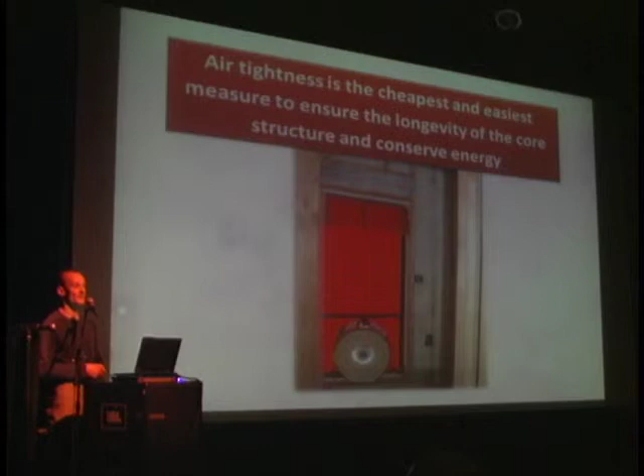For reaching real good air tightness, we basically need to design continuous air layers. You can go on Cold Climate's page and download a manual. We've written about a lot of these things.

Minimize penetrations. One argument I've been making with Alaska Housing for many years is we need to pre-test our homes. Right now energy audits on new construction are done at the end of the project, when it's too late, we can't fix it. We need to do another test after the rough-ins are done, before the walls are closed up, so we can find leaks and fix them. It's so simple, so basic, it makes so much sense. I don't know why we're not doing it.

In our climate especially, windows really are the key. Windows and doors are the weakest link. It doesn't make any sense for us to put windows facing north—they're a loss, there is no input. Oftentimes it's difficult to avoid, but we should at least minimize it. We can overcome the R-value, which isn't there in windows, with thermal shutters, but we cannot afford not to let sunlight put its energy into the building.

That's called the solar heat gain coefficient. If you look at most windows sold on shelves in Fairbanks, they're not looking at that at all. People don't know what this number means, but it's so important. It's not about the R-value, it's about how much energy can be captured. In my opinion, for south-facing building sites, it needs to be at least 60%. A lot of the bigger brands sold in town are at about 12%.

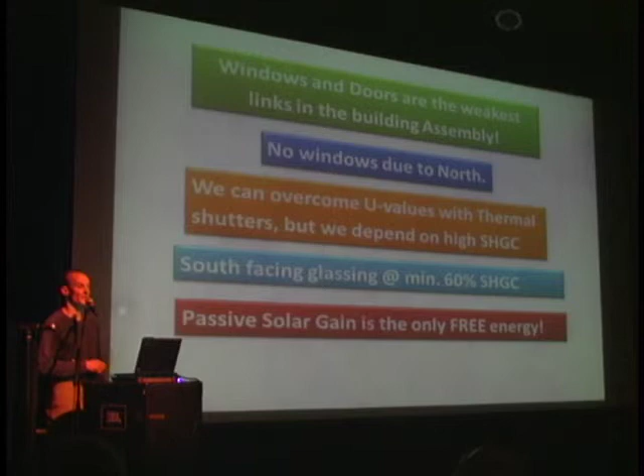So next time you go window shopping, make sure you look at that. There's only one free energy you're ever going to find in a building, or in general, and that's passive solar. No maintenance, nothing to it. It will never break down, never need a pump changed. It always works and it's free.

Windows is what we need. Better windows is what we really, really need. We have good windows—we have two good window companies in town which can make insulated fiberglass windows.

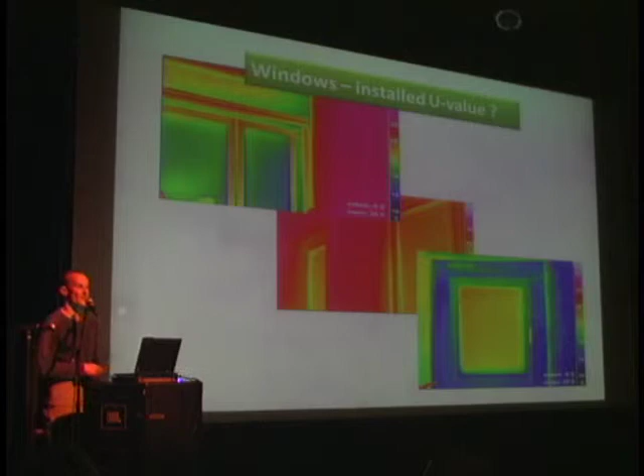It's not just about the window, it's also how it's installed, and that is very, very important. We need to install these windows halfway within the wall, and over-insulate the frames. That's basically shown here. That keeps the edge warm, which is the spot where we have the biggest heat loss. Passive House has done a big study on this—I've learned this the very hard way over the years, and it's very interesting. It's about a 20 to 22% efficiency increase with the same window, same material, just a change of installation.

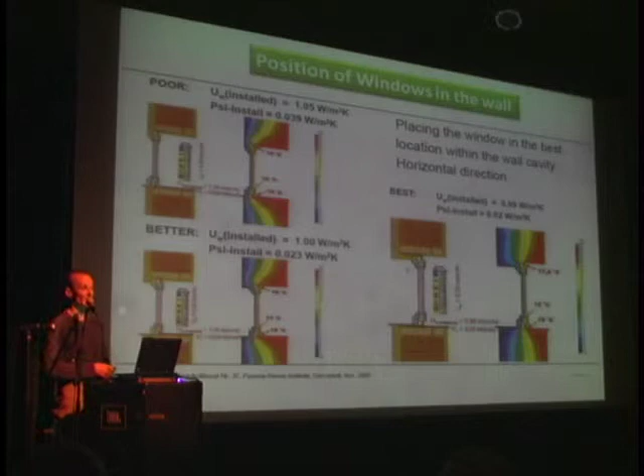This is the weakest point of installation in general, and we're gaining for free more or less 20%. That's huge. Put a thermal shutter on it, and then we're basically where we need to be.

In the wintertime with 40-below air, a heat recovery ventilator bringing fresh air into the building can only do so much. So I'm a firm believer we need to start pre-warming that air, and that's fairly simple to do with a small geothermal loop—400 feet of pipe is all it takes. It doesn't take much electricity to run. I can run my HRV at 40 below with only a 3-degree temperature differential between supply and return.

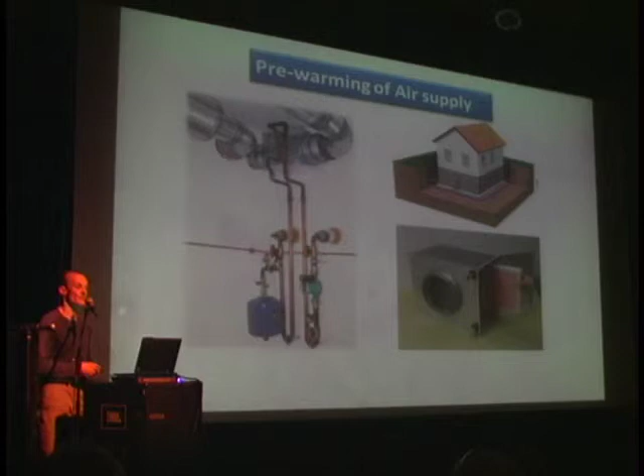That doesn't mean much for the average person, but anybody who understands the physics of that knows it's incredible. It basically means I pull in 40-below air and I only lose effectively 3 degrees. So I dump out 70-degree air and I'm still at 67 degrees. It's a big, big, big advantage in our climate.

I really believe we need to start looking at the basics—where is efficiency in design? We need to stop thinking about how do we heat this place, and instead think about how do we keep the heat, understand heat loss, make it work for us and not against us. Size matters—we need to build smaller. There's plenty of 10,000 square foot houses we built last year in this town. I don't think that's so advisable anymore.

Keep it simple. I showed very complicated stuff here about my solar thermal system, but in reality it's really simple—there's nothing to it. There are 4 pumps and there's less plumbing, about a third of the plumbing there is on a boiler. Figuring it out and making it all happen was the hard part. It's not complicated.

True costs of super insulation.

That is of course the big crux, and I'm fighting this all the time. I have lots of people coming in and they're like, I want this efficient house but I can't afford it. What am I going to do? And I don't have a good answer for this. That is a problem with our financial situation we're all stuck with.

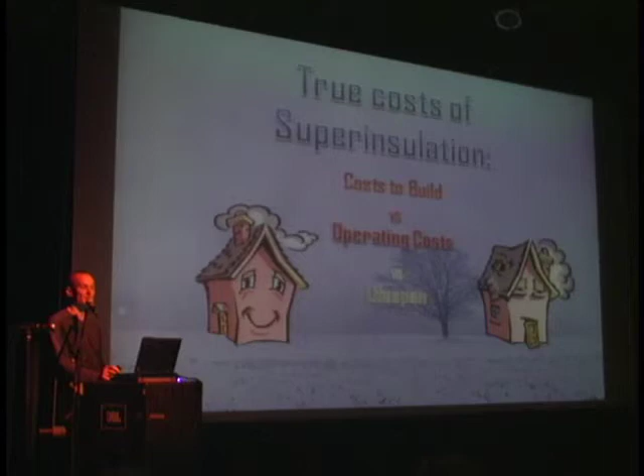The truth of it is we need to look at not just the costs to build anymore, but operating costs and lifespan, especially operating costs. On a commercial building, that's 84%. On a residence, that's still way up there. What does it mean, really? The money is not in the building, it's in running the building. And right now, all the cost analysis we do is on the costs of the building.

Energy costs, unfortunately, as we experience every day, are a moving target. And God knows where they are going. Hopefully I'm wrong and they're going to come back down, but I have my doubts. And if we look at the global scale, not just what's happening in the United States, what we're seeing right now we have never seen in history.

There is no real value anymore, anywhere. Everybody's borrowing money from anybody. Our deficit is so high it cannot sustain itself, on a daily basis of $10 billion. It's just unheard of, there is no answer to it. Right now we are in free fall, and it's just a matter of time when we're hitting the ground. Being somewhat prepared will help, but we're already late.

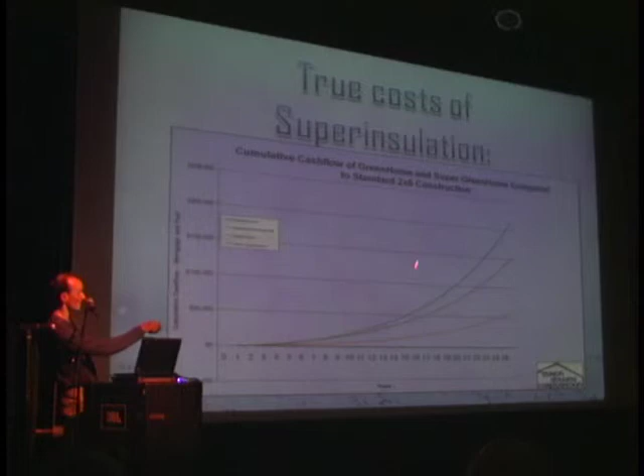If we're looking at the costs, the bottom line you see basically is your average house, and then going up. Passive House isn't even on this study, but passive house would be up here. It pays back from day one if you look at true cost of ownership. And that is really the only thing we need to make bankers, appraisers, and our government realize: there is money to be made with this, if we super insulate our buildings. We're all ahead of us.

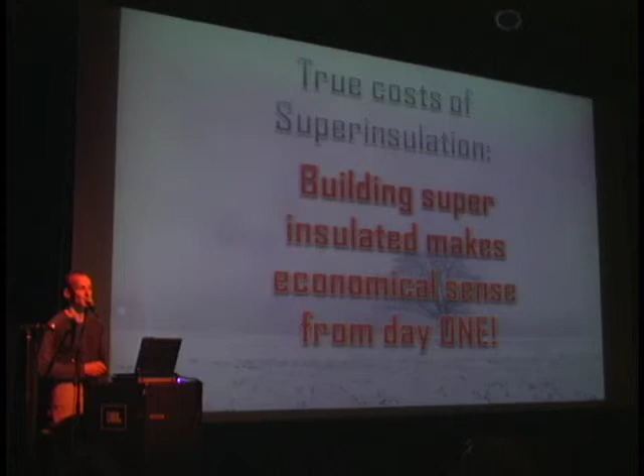It makes, not just for us as comfort, but also for our economy, it makes sense from day one. That is my strong belief, and that is something we all need to work on. This is the big thing, one of the key messages I want to really give everybody here: any new building we build today can either be an opportunity, or as 95% of all the buildings we build today, a liability which we will go back within 10 years and fix.

Any building, if you're trying to build a house here anytime soon, think about this: do you want to go back in 5 years, in 10 years, and completely redo this house because you cannot afford living in it? Does this make any sense? It does not. So think about it clearly and keep your eyes wide open. But the opportunity is what we really need to look at.

There's a lot more in buildings than efficiency. I'm going to just go through this real quick. We shall not forget where we are coming from, and that's a completely different problem than efficiency as far as energy consumption goes. But we need to look back at where we are coming from, what makes us humans, and what is actually a building to us. Is it just a shelter, or should it be an extension of ourselves, some place where we can feel comfortable, not just thermally, but also as humans?

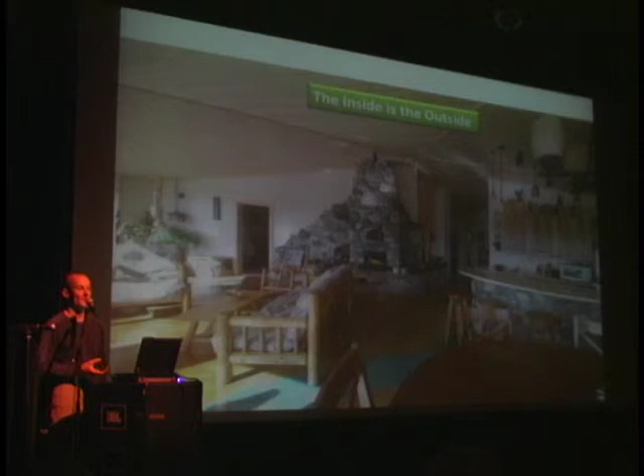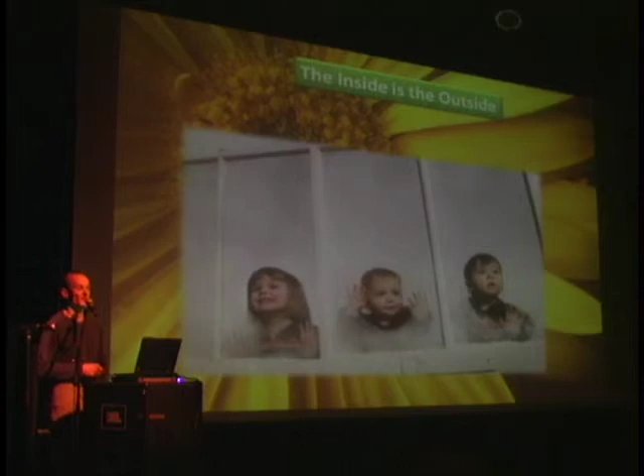That is an even bigger problem in our modern buildings, in my opinion, than energy efficiency. We completely disconnected with what makes us human within buildings. In the future, I strongly believe we will not just look at high energy efficient buildings, but we will build living buildings. There's no way around this.

This is the only sustainable way we're going to be able to live and build in the future. This is not going to be tomorrow, but it will be sooner than we might expect. Buildings will create basically their own heat, their own water, rain collection, grey water recycling, and they will keep everything on site. That is something we can do already today.

Technology is there, knowledge is there. It's nothing we have to invent. This is nothing unobtainable, this is today's technology. We're just not putting it into place, because we're saying it doesn't make sense economically, but it actually does if you're looking at it properly.

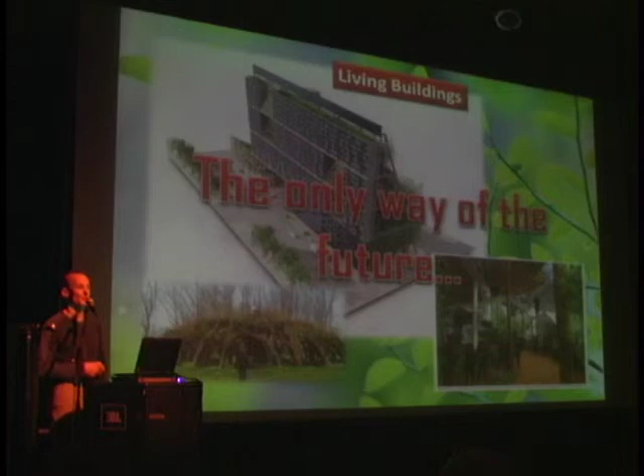The first thing I really wish Fairbanks would get would be a passive house school. If we need anything, we need better education for our kids, so that they're growing up a little smarter than us. People often ask me, why are the Europeans so far ahead of us? It's energy costs, but it's not just that, it's education. The kids are growing up in a different environment. They learn a bit differently about what's important and what's not, and that I think is the big difference I see.

At any building conference I go to in Europe, there is no haggling about climate change, about energy costs, will they go up or down. Nobody argues about it. They're more focused on what do we need to do to cope with these challenges ahead of us. Versus here, we're just around the table arguing.

Anything we do in buildings, we should always remember that our health is priceless. We are building buildings which are very, very bad as far as health is concerned. We are not taking proper precautions on what makes homes actually livable. Before we look into energy efficiency, we need to look at health. Health is always what needs to govern everything else, in my opinion.